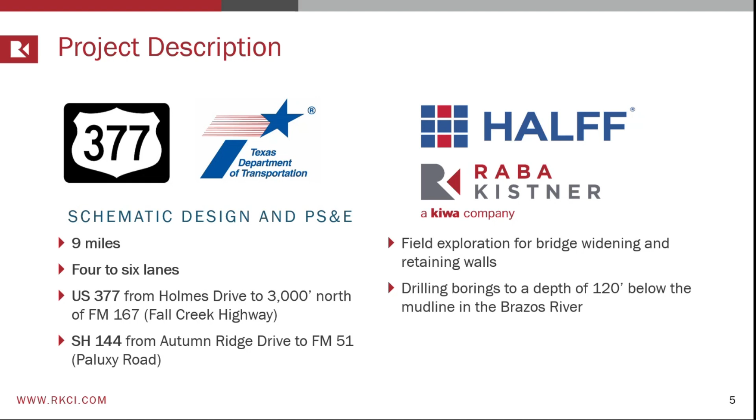The team that participated in the project, Halff Associates was the prime consultant. Raba Kistner was part of the team on geotechnical work scope. There were actually 2 geotechnical consultants, but we took the task of doing the drilling on the lake. And basically, we had to drill borings to 120 feet deep below the mud line in the Brazos River to develop the deep foundation design for the bridge widening.

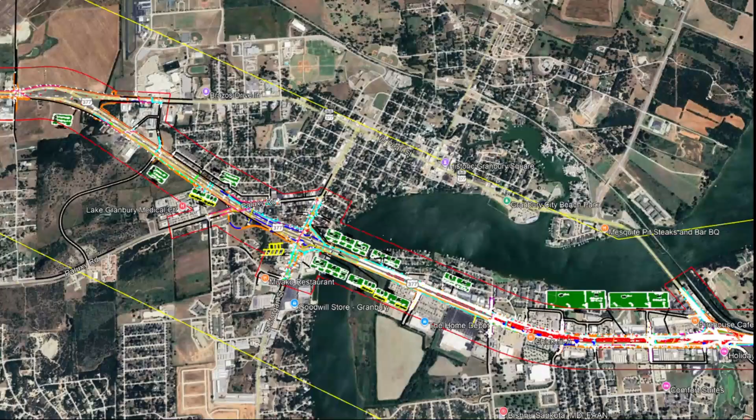This provides a schematic of what the project entails close to Granbury at the Brazos River or Granbury Lake. And basically, the original plan was to drill 5 borings, 3 on the north side of the bridge and 2 on the south side. The scope had to be modified because of reasons that Ifham will explain, but this was the original plan.

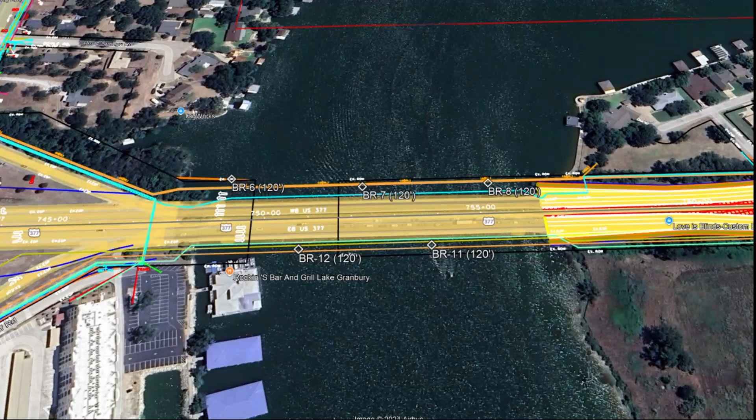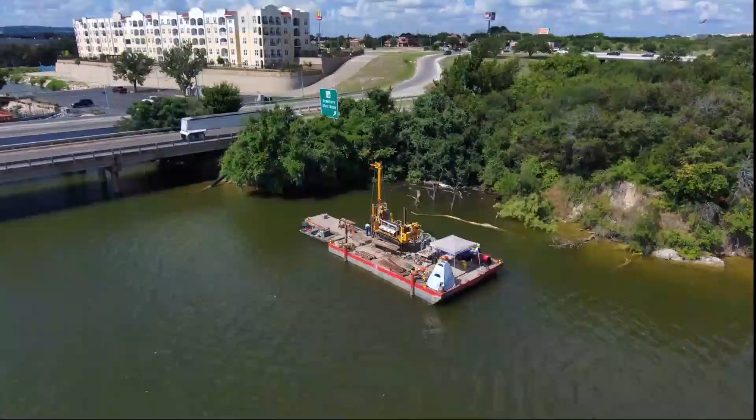And here we have a view of the setup of the barge drilling. This was taken with a drone that we use. Basically, you can see the track mounted drill rig on top of the barge conducting the borings right there in the river.

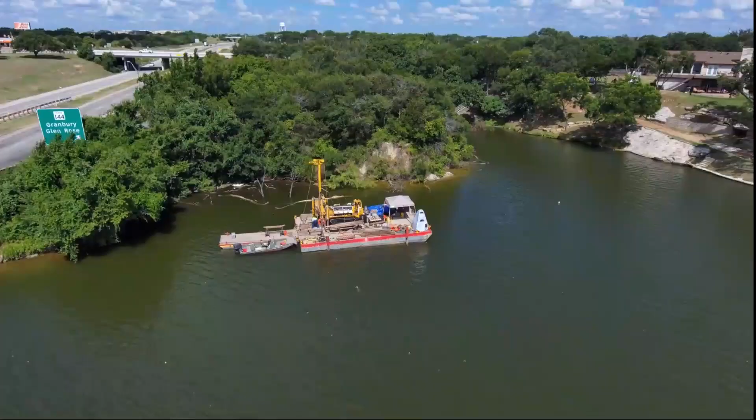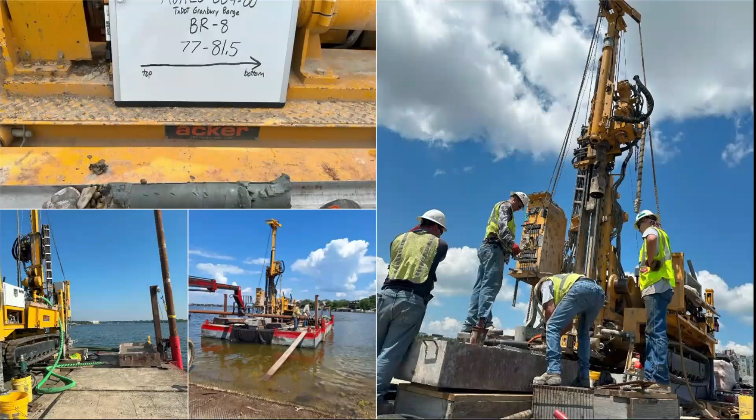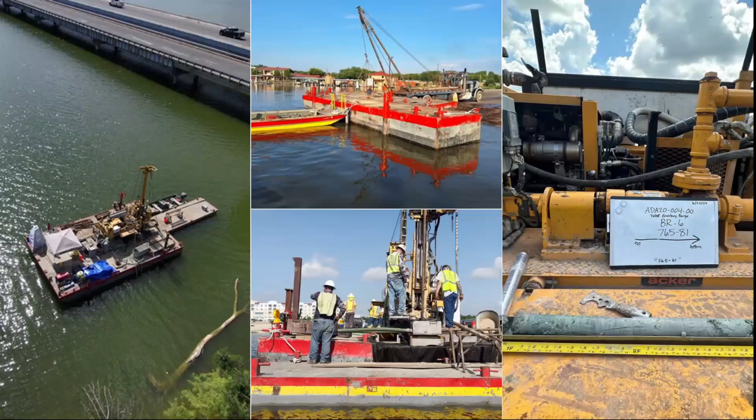And here we have some photographs basically illustrating the conditions inside the barge. It is difficult. Doing a geotechnical project is always challenging, but doing it in a very confined space in the middle of water always creates more challenges. So you can see some of the setup and how we were set up to conduct this drilling. Again, other photographs illustrating the drilling crew, how we would set up the samples, and basically the boats that we would have to transport people to and from the barge as we were drilling.

And I will ask Ifham to talk about some of the barge drilling challenges and solutions, how we planned for them.

Hi, good morning. Can you guys hear me at the back? You're fine? Okay.

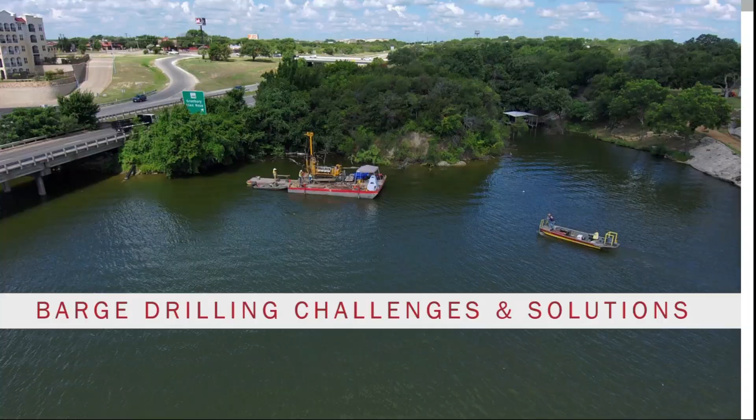All right, so I'm going to walk you through some of the challenges we had in the project and also how we planned to mitigate those challenges. There are a number of challenges we'll go through one by one. The first one is the project implementation itself is a challenge because we don't do barge drilling on a routine basis. It's pretty rare that we have a project with barge drilling. So the data points, the experience, and the resources are very limited. So we have to come up with a meticulous plan for how we are going to execute this project.

There are several stakeholders involved in the project. We need to keep them updated and communicated of the progress. And then we also knew, since there is very limited experience and resources, we were going to have some unexpected challenges which we didn't know, but we should be able to adapt and be agile to manage the project.

There are many drillers who are qualified and experienced with TxDOT, but when it comes to barge drilling, the drillers and the drilling companies are very limited. So we had to search for drilling companies, not only throughout Texas, but also in Louisiana, to find the right driller who has the qualification, experience, and is also willing to work on this project, because these projects are very high risk, and not all drillers want to work on these types of challenges.

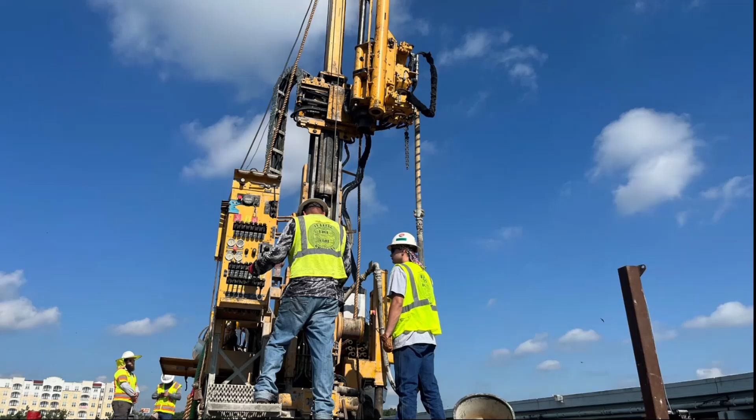So we found a few drillers, we checked their experiences, talked to their referrals, evaluated them, and finally shortlisted 2 drillers, interviewed them, and selected a driller out of Austin. The driller has a significant amount of experience doing barge drilling, mainly in the Austin area, especially in Lake Austin and Lady Bird Lake.

And there are several agencies that we have to seek permits from, including Brazos River Authority, Texas Parks and Wildlife, Texas General Land Office, U.S. Army Corps, the city, the county, and the project owner is TxDOT. So we have to go through all the hoops and make sure that we meet their requirements before we begin the drilling.

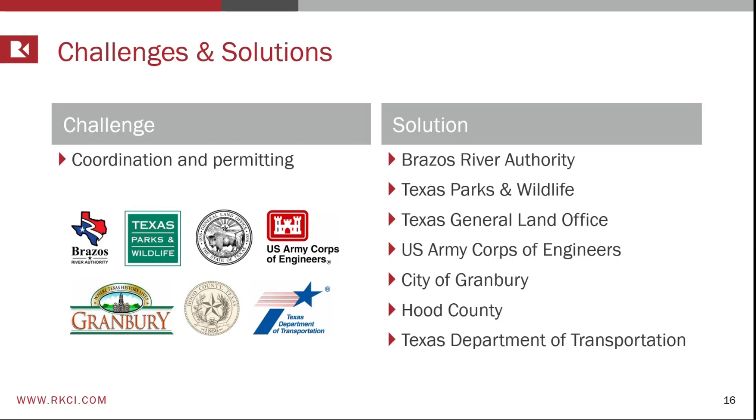We all know drilling is a pretty unsafe operation. There are several hazards involved in it, but since we do drilling every day, we know how to mitigate and handle that. But here we are in a situation where we are drilling from a barge in a lake. So that gives us very minimal or even no reaction time if something goes wrong. So we have to be extra cautious and prepare ourselves to deal with any unexpected safety hazard.

We went through a job safety analysis. We developed a site-specific health and safety plan, and the drillers and whoever is on the barge should be aware of the situation and should be able to make decisions pretty quickly in order to be safe.

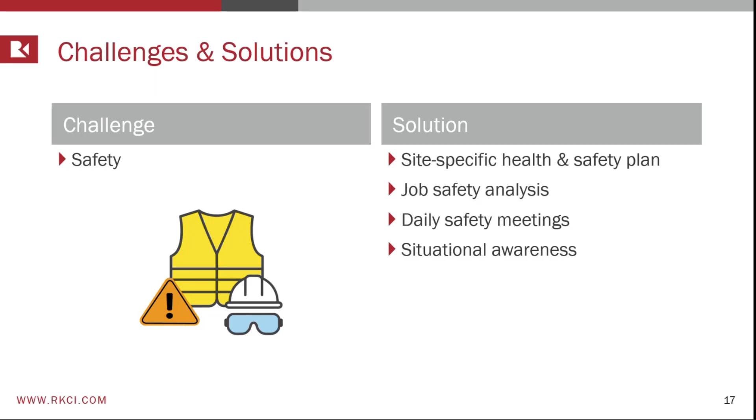We also had to come up with an operation plan, especially when it comes to the barge. How do you lower your barge into the water? It depends on the water level. If the water level is too low, then you need a crane to take the barge and put it in the water. Fortunately, the water level was good enough for us to use a boat ramp to launch the barge into the water.

And as you saw in the previous image, we had borings on both the south side as well as the north side of the bridge. And there are 2 options. We first initiated our drilling from the south side, and to go to the north side, if the water level is too low, you can tow your barge and drill rig under the bridge to the other side. But if the water level is too high, then there is not enough headroom.

You have to come back and unload the drill rig, disassemble the barge, carry all of it to the other side of the river, then assemble the barge again, then load the drill rig. It's a pretty big operation. It's going to take about a week and a half just to do that.

And we didn't have enough data. We didn't know how much headroom we had. So we prepared for all scenarios. We didn't know which one we were going to implement during the project, but our plan was to cover every possibility.

We also had a tight deadline. I think we started the drilling around late May or early June. And the Brazos River Authority wanted us to complete everything by July 4th, because that is the busiest weekend on the lake, and they don't want any disruption to the boat traffic.

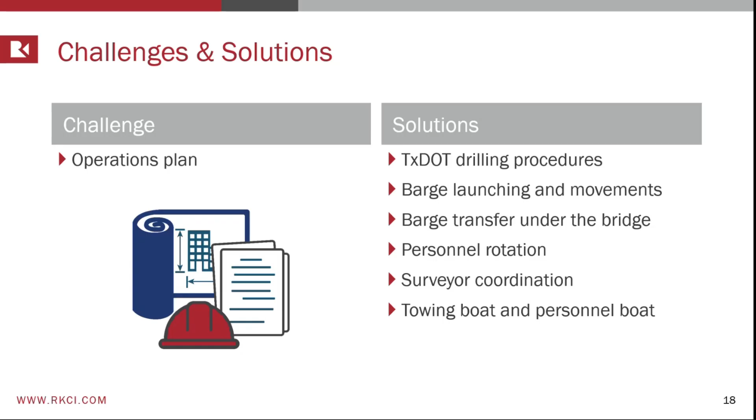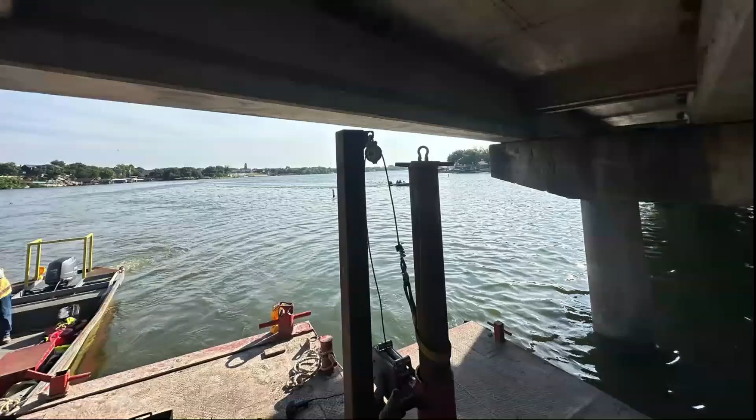So when we actually did the borings, the water level was such that there was enough headroom between the bridge deck and water that we could tow the barge underneath, but not with the drill rig on it. So it's enough for the barge, but not for the barge plus the drill rig. So we unloaded the drill rig at the boat ramp and then just towed the barge only through the bridge. And you can see there's not much gap between the beams and these rods.

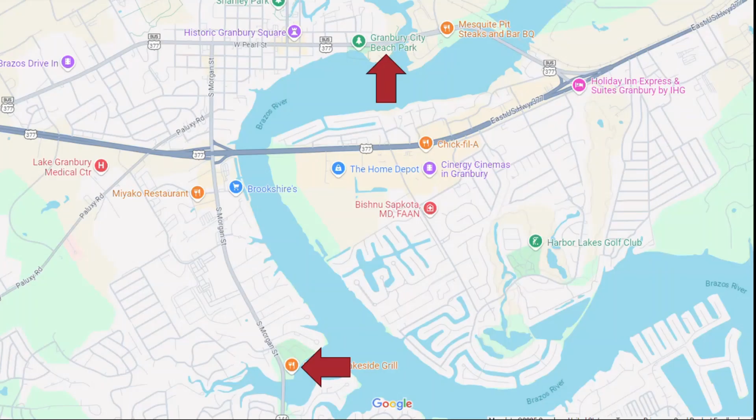And these were the two boat ramps that we used to launch the boats and the barge. The one on the south side is owned by Brazos River Authority, and the north one is owned by the city of Granbury. So we had to coordinate with them to make sure we don't disrupt their operations. These are public parks, so we have access as we needed.

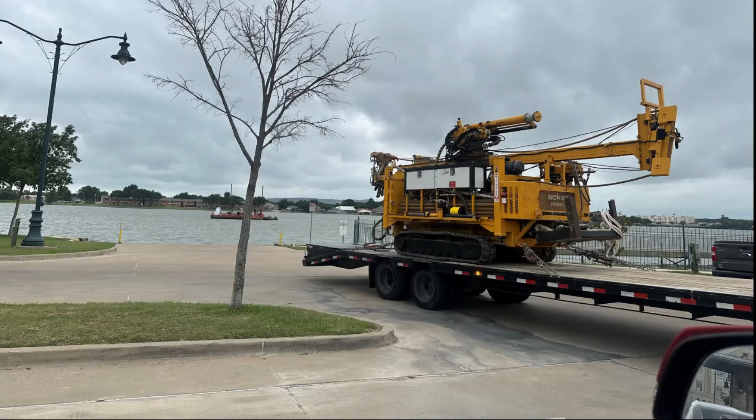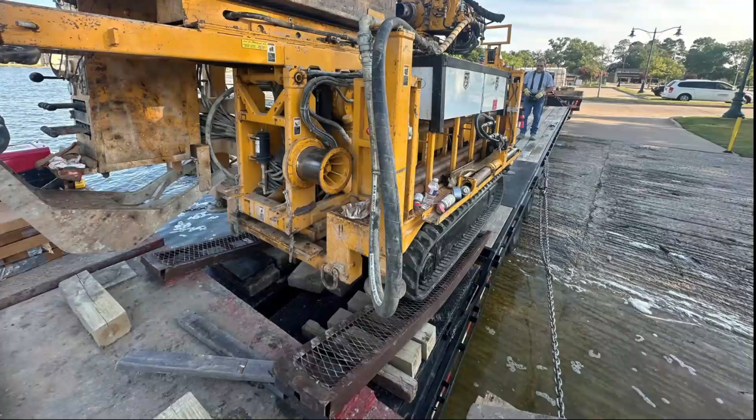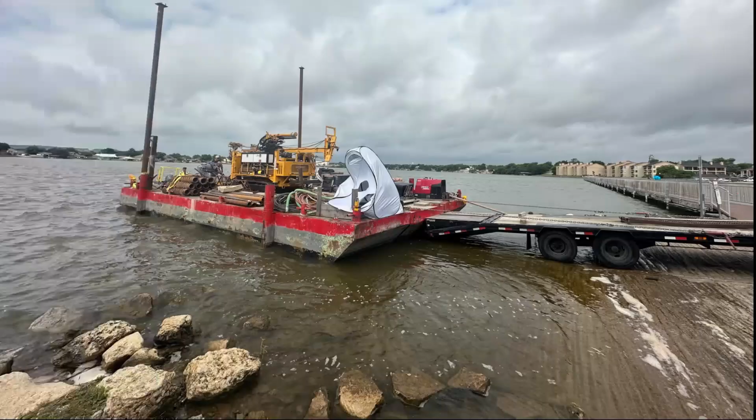Here is a picture on the north side of the park where the barge is towed to the boat ramp while the drill rig is taken to the ramp using a truck. And here it is, the drill rig is being loaded to the barge. You can see that it's maneuvered using a remote control. So it's a pretty neat device. And here it is loaded and ready to go to the other side of the bridge.

The next big challenge is underground utilities. We knew there were 3 lines going parallel to the bridge under the water: a fiber optic cable, a water line, and a gas line. And you know how challenging it is. Even on land, damaging a utility line is pretty hazardous. It can have significant consequential damage. Now imagine hitting a gas line underwater, and I don't even know if that is possible to fix.

Most likely these were installed using directional boring. So if you hit something, if you damage something, it's almost impossible to fix. And the consequential damages will be so high, probably your insurance won't be able to cover that. So we had to be very careful about it. The only data we received from TxDOT is quality level C SUE data, which means these utility lines were approximately mapped, and they were not physically verified, which is really not good enough for drilling. It's not really dependable data.

So to make sure we are safe, we wanted to stay away from these mapped lines. Another factor is that when you locate your borings, you use a GPS device, which has its own error. On land, you can actually use physical features to verify and cross-check you are at the right location. You can't do that on water. So there is uncertainty with the utility line, and also uncertainty with your own location.

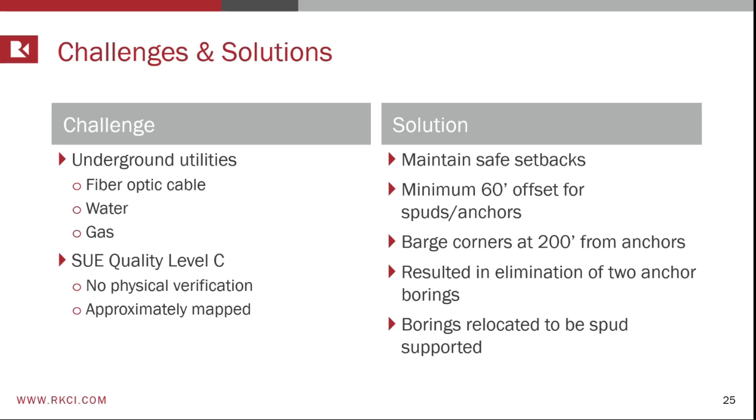So here is the map. Here are the five borings; basically we want to locate the borings close to the bridge, right? Five borings right here. But we also have these utility lines running there. So we moved our borings 60 feet from the utility just to keep a safe distance, right here, like 60 feet. And if you can use the spud method, we can drill the boring right there.

But if you have to use the anchor, your anchor is going to be right here, and then you have to go 200 feet to locate your boring, and then the next anchor will go this direction, there and there. So it's like a cross, and this will be a boring location, and this distance from the bridge to this one is about 250 to 300 feet.

And same right here, we cannot do a cross there because there is a marina, so we have to come in this direction and use X-shaped anchors. So the possible locations for anchors are this location, this one, here, here, and here. All of these locations are really far away from the bridge.

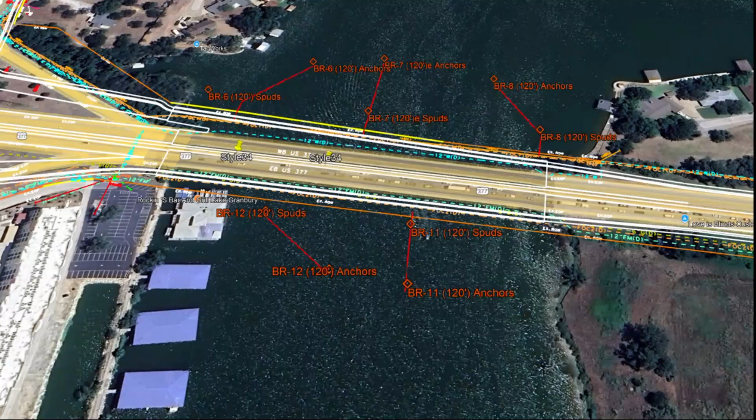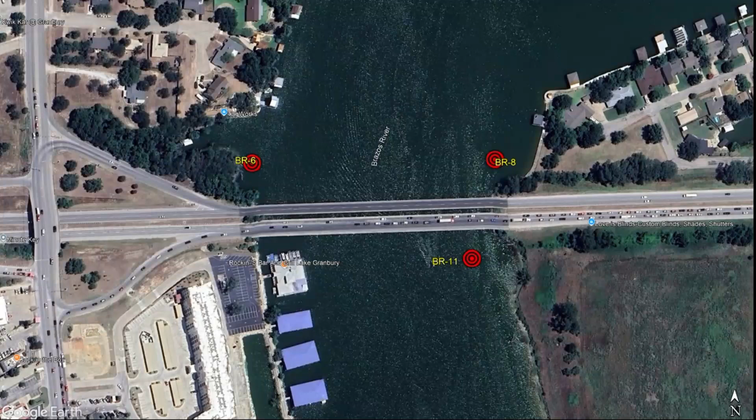So we decided to change the scope and rearrange the boring locations. So we ended up actually drilling only 3 borings, right? They are close in the shallow water, about 20 feet deep, just because of logistical reasons. And here's a picture with the spuds raised up. You can see that. So the barge is at this point floating and you can tow it. Once you reach your required position, then you can lower the spuds and position your barge. Now it's fixed.

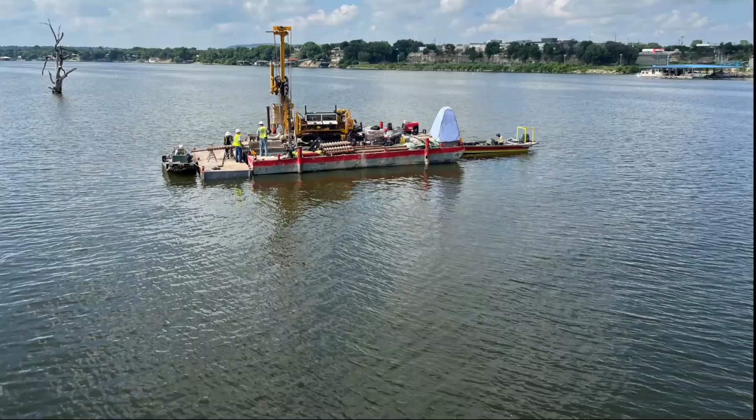We also developed a contingency plan just in case of an emergency. Now these borings are pretty deep, 120 feet below the mud line, and we have 20 feet of water. So we are talking about a 140-foot boring, and we have to grout it. It would take about 5 days to complete a boring. And during these 5 days, we cannot really bring the barge back to the shore. It has to stay at the location.

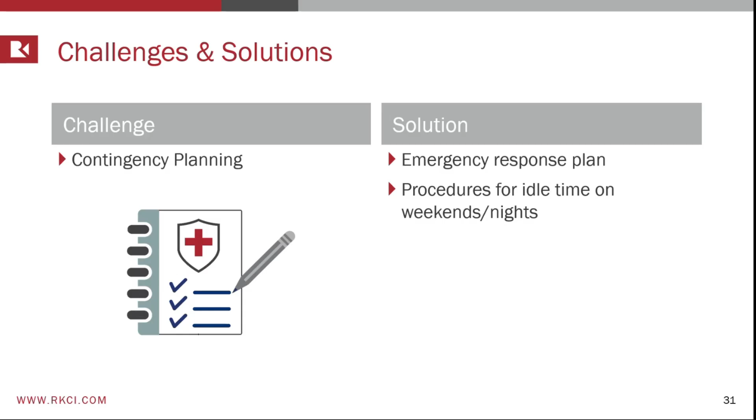So overnight there will be traffic. So we left lighting and everything on just to make sure it's very visible and no one is running into it. So the drilling finally went well. Actually, we didn't have any weekend breaks because of an issue we had. We had to expedite the schedule. We continued drilling throughout the project. The drilling went well, and we were under the constant supervision of inspectors and all different agencies. It went well, but there was a hiccup, and that is what Isidoro is going to talk about.

So as Ifham mentioned, we thought we had thought of all the possible challenges that we could find, but there was one we didn't think of. Basically, we hired a specialized drilling subcontractor who has done this type of work extensively in the Austin area. He ended up renting barges from a third party, and these people work together a lot in the Austin area, in Lake Austin, Lady Bird Lake.

Lake Austin and Lady Bird Lake are infested with zebra mussels, and it's so bad that it is state law that whenever you move a boat or any watercraft from one lake, you need to decontaminate it. But I guess the situation is so bad in Austin that they don't even do that. And because these people work primarily in those areas, they forgot to do that decontamination before moving the barges to the Brazos River.

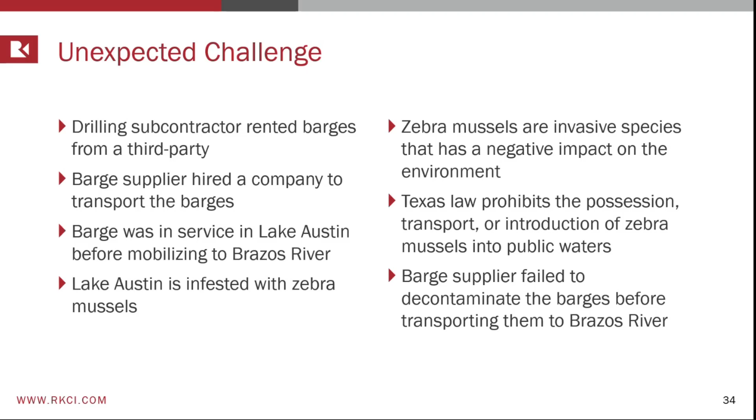I don't know if you're familiar with that, but zebra mussels are an invasive species that have a very, very negative impact on the environment. Texas law prohibits transport or introduction into public waters. And basically, the barge supplier failed to decontaminate them before transporting them to the Brazos River.

So we were very fortunate that at the boat ramp that belongs to the Brazos River Authority, there were inspectors looking at everything. And just before it was launched into the water, they observed that there were some zebra mussels on the hull of the barge. As I mentioned, state law prohibits the introduction of zebra mussels, so everything came to a halt.

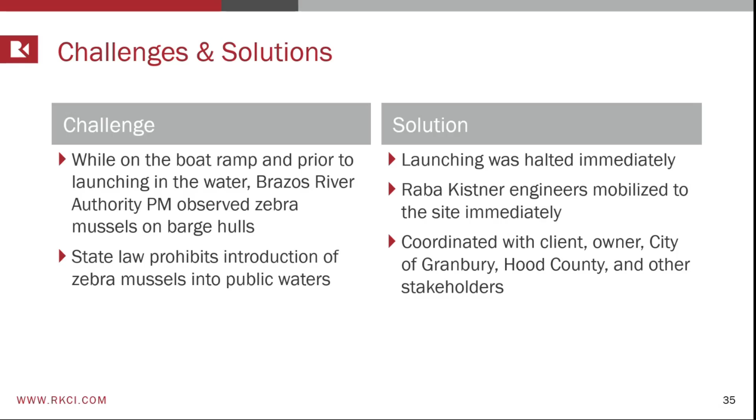As I mentioned, state law prohibits the transport of them. The barge provider retained a company to deliver them, and they were unloading the barge and they wanted to leave for another site. And wait a minute, the authorities immediately said, you're not going anywhere. There's going to be a decontamination and we're going to go through a process here.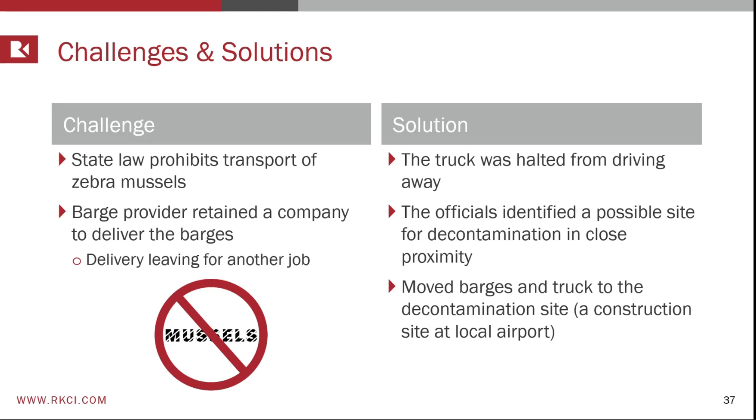So the truck driver was halted from driving away, and the officials identified a possible site for decontamination in close proximity. And this was a construction site basically at the Granbury airport. There is construction going on, and there was a large area that was covered with gravel for construction. That was a site that Hood County and the city of Granbury designated for that decontamination. And basically, we have the barge that was mobilized away from the lake and into this construction site where the risk of zebra mussel spreading was very, very low.

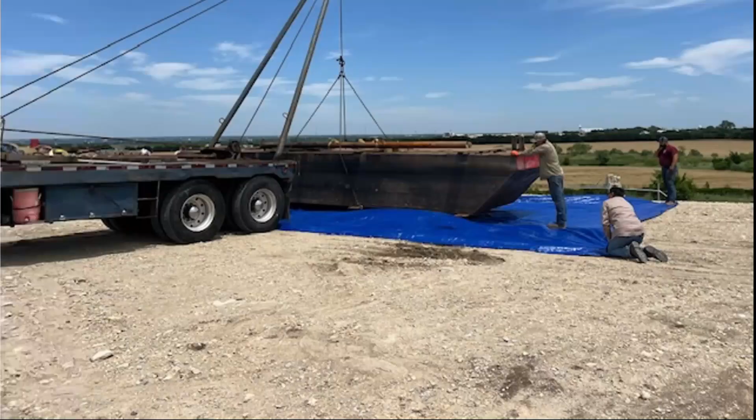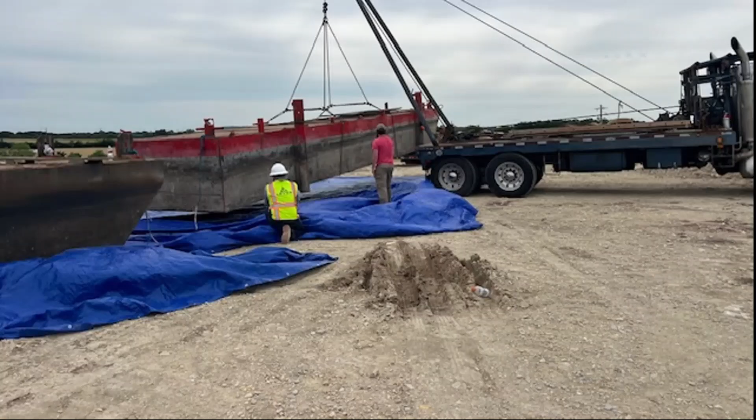So here we have them. They are starting to unload the barge into tarps so that any of those mussels that fall down can be contained and taken away. Again, other photographs of how, under the supervision of Texas Parks and Wildlife biologists and people from Hood County and city of Granbury, they started the process of decontaminating all the equipment that was suspect of containing zebra mussels.

Now, it was good that this was discovered before the barge went into the water, but there was still a question. Did any zebra mussels fall onto the ground or the boat ramp that can eventually make it to the lake? So Texas Parks and Wildlife inspectors do a thorough inspection of the boat ramp, and they didn't find anything. But out of an abundance of caution, Hood County decided to bring in a flat wheel roller compactor to make sure to go through the entire boat ramp.

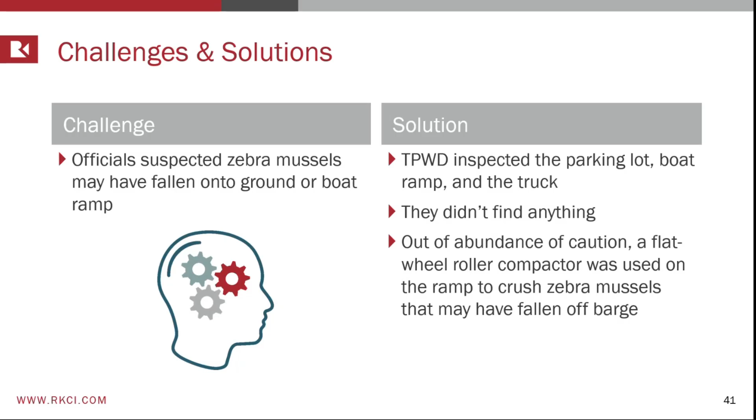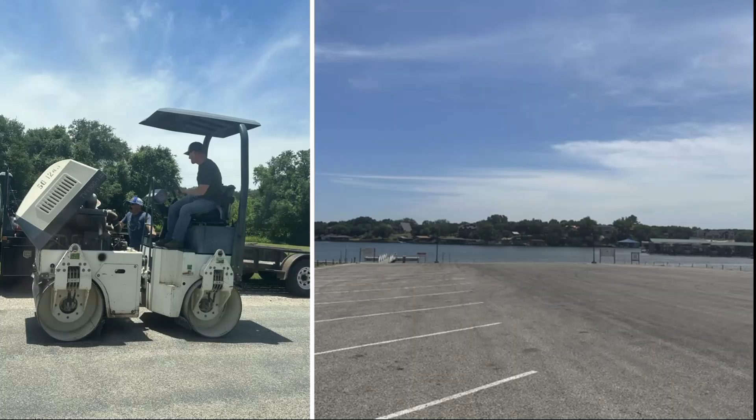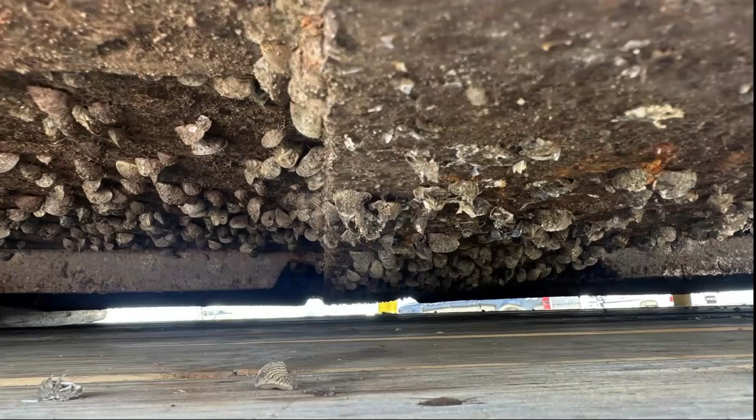And if there was any zebra mussel that may have remained, that would be crushed and it would not make it into the water. So here we have a Hood County flat wheel compactor that was used to go through the entire boat ramp just to make sure, out of an excess of caution, that nothing would go and cause damage into the Brazos River, Granbury Lake. Here we have another photograph showing just how pervasive, once the zebra mussels come into the bottom of the barge, they just get stuck there, and it's very, very difficult to get them out of there.

So the next challenge was, what is the decontamination protocol? Basically, Texas Parks and Wildlife had the solutions on how to do it, but they wanted the responsible party, which was the barge supplier, who were the people in the first place that should have decontaminated and not transported it, to develop a decontamination plan.

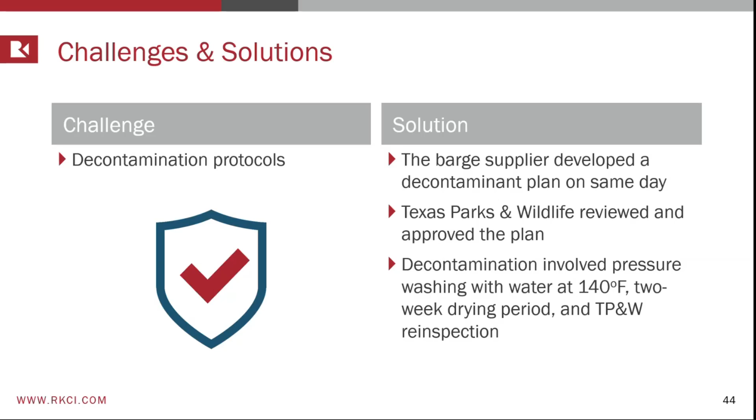And basically, the plan involves decontaminating with water at very high temperature, 140 degrees Fahrenheit, and then a 2-week drying period. That period of heat will allow the zebra mussels to die, and then a reinspection would happen by Texas Parks and Wildlife. And the decontamination plan was created by the barge supplier right there on the spot. It was reviewed by Texas Parks and Wildlife, approved, and they decided to go ahead.

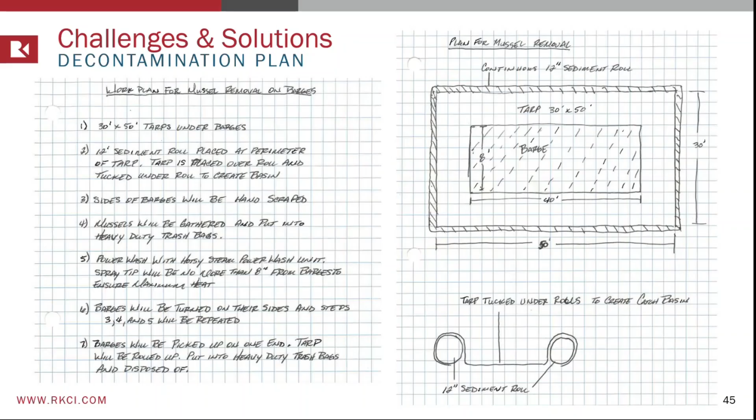And basically what it was, getting the tarps, getting the barge in the middle, and then that would be a place where it would be basically applied at high pressure water at very high temperature, collect all of that in that tarp, and then let them sit under the Texas sun for an extended period of time to make sure that all of the mussels died. Here we have some example of how they set up those tarps. Again, this area is very far away from the lake. So even if some of the mussels fell into this ground, the risk was pretty minimal.

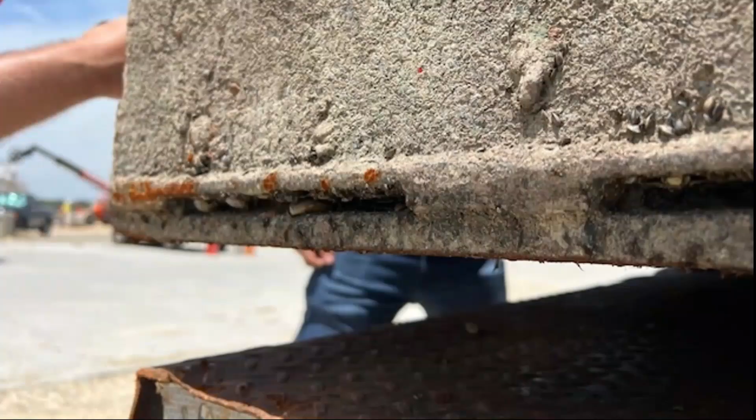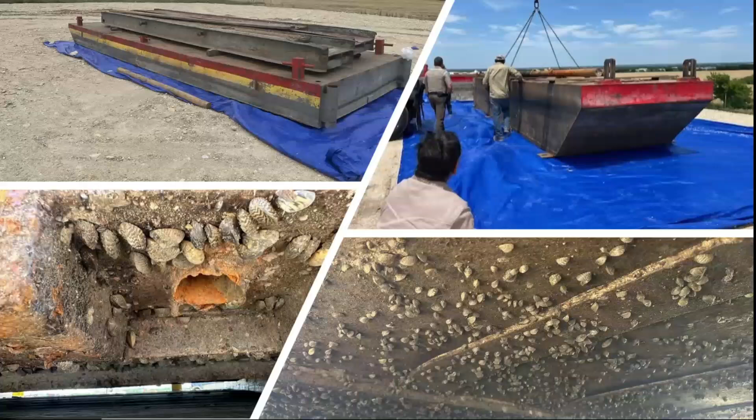And this other photograph shows just how pervasive those zebra mussels are; they can get into very tight spaces, and they just get stuck in there and cause all kinds of problems. And that's why there's such a concern for Texas Parks and Wildlife. Here we have other photographs illustrating the setup of how all of that was implemented. Again, you can see those zebra mussels stuck close to all of the items of the barge. They were just everywhere.

So eventually, the decontamination process was held. Texas Parks and Wildlife conducted a reinspection, and once they considered it to be safe to get the barge in the water, we were authorized, we went back there, and we proceeded with the project in the way that Ifham described.

What are the lessons learned and the conclusions? Verify, verify, verify, triple verify. You should not assume that because you have sub-consultants who are qualified, that they will think of everything possible. As Ifham mentioned, we interviewed people from throughout Texas and Louisiana to find a driller who had the experience to do this. We did not realize that he didn't own the barge. He was renting that barge, and the people who own it, because they work in an area where zebra mussels are so prevalent, no longer think of the state laws when they need to transport a watercraft to another area.

Some of the lessons learned: verification of utility locations. Utilities are always a challenge on land. In the water it is even more challenging because of the uncertainty on where exactly they are. Verify the qualifications of all your subcontractors and go to every possible tier. Make sure that even at third tier or beyond, there's coordination, there's understanding of the regulations involved, and that everybody will perform as the plan requires. And you think that professionals would know the regulations for their specific tasks. Don't assume that. You have to verify every time.

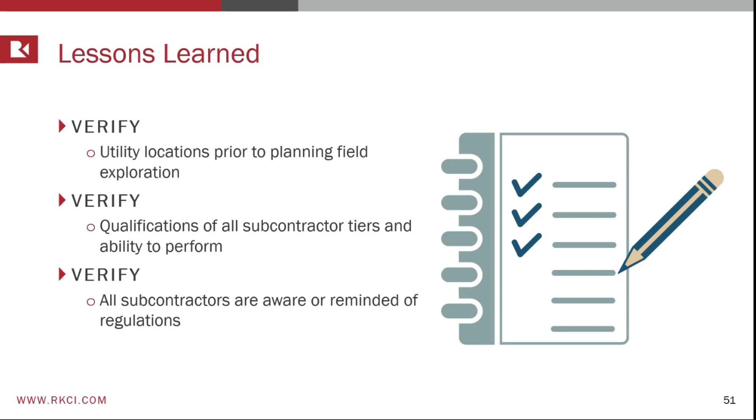Pre-planning is key. Without proper preparation, we would not have been able to execute this project in time. And as Ifham mentioned, there was a big concern from all authorities to get this project completed before the 4th of July. That's the day when there's the most people attending the lake, people on jet skis, people on boats, people doing all kinds of things, which increases the level of risk.

Expect the unexpected. Things will happen in a high risk situation like this one. Rapid response is critical. Be cooperative and adaptive. The rapid response that we were able to achieve here would not have been possible if it hadn't been for all of the people involved from the different authorities to work together and find a solution. If red tape had come into play, I don't know that this would have been able to get resolved in the time that it did.

Maintaining open channels of communication and trust with all project stakeholders is critical. A lot of the problems in engineering projects are not the engineering, it's the communication and the trust. And consider contingencies whenever you schedule a project. This is critical. Contingencies will always come, and how you respond to them is key.

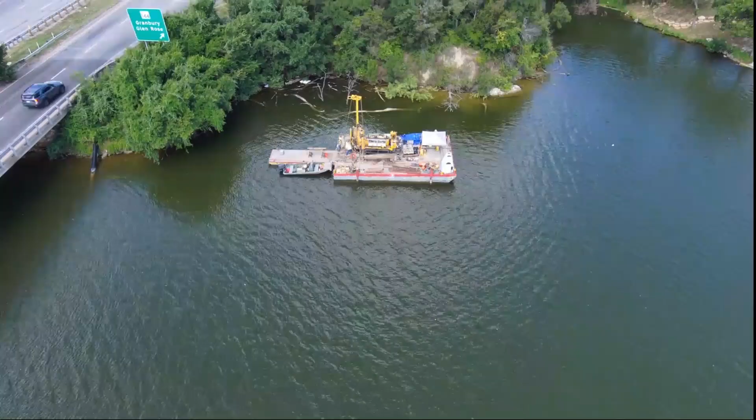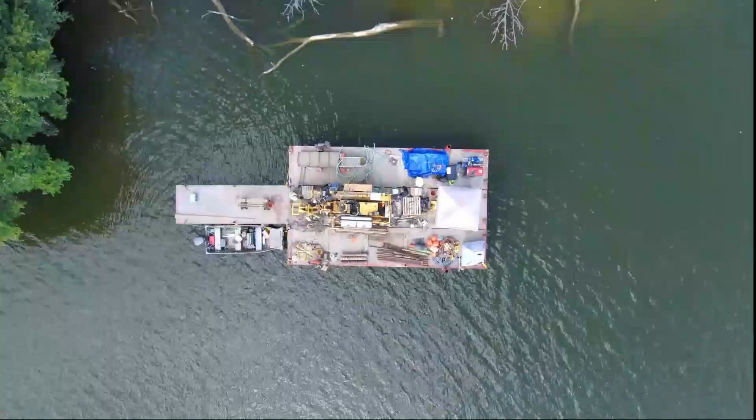And with that, I open it for questions. There's another view of the setup. Again, we took a drone to take a view of the operations when they were going. You can see how little room there is inside the barge for all of the equipment that's needed, all of the tools, sample handling, and so on. So it's always a challenging and interesting setup. And with that, we open for questions.

Yes. Have any issues with the actual drilling? No, we didn't have any issue. It's limestone. It's Glen Rose limestone. The drilling went really well. Yes. Who was that contractor? Come on. Well, we'd rather say it offline. We don't want to put anybody on a bad spot here, but yeah.

Yes. Who absorbed the cost for the decontamination? That was the responsible party. That was the barge owners, because they were the ones who violated state law. They were the ones who transported it in violation of state law, and they were the ones who had to cover all of that cost.

You have some delay costs from the other contractors? You know, the entire team, TxDOT and our clients, they worked with us. Even though there were delays to the project, we were able to recover schedule and get the project done before the 4th of July. So we didn't assess delay charges to them. We just tried to work together to come to a solution. The solution being make sure the decontamination happened, and we were authorized to proceed with the project.